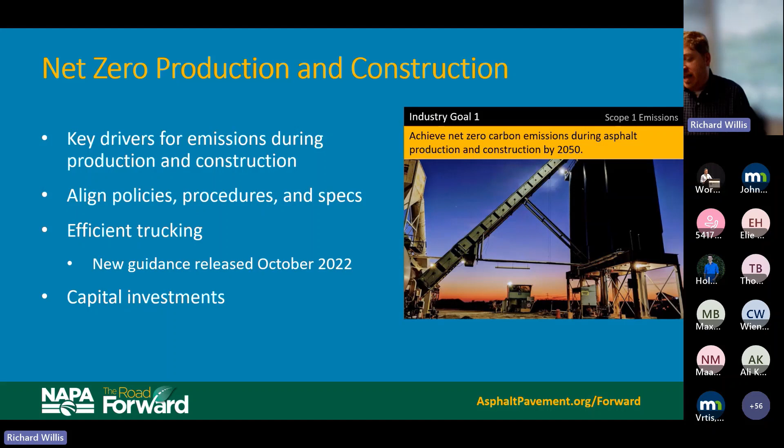And in order to upgrade a lot of the plants that are out there, it's going to take a significant amount of capital investment to take some plants that have been there for a generation or two and make them more modern. But it's not just that. The plants that we use, we could do a lot better with in many cases.

NAPA has an old document that was their Quality Improvement Series number 26, and it was Energy Savings and Energy Management for Your Plant Facility. This year, luckily it's in layout right now, we've got a new document that's going to kind of update this: How to Save Money and Reduce Emissions at Your Asphalt Plant.

It's how do I look at my operations as a manufacturer and do things that I know are not just going to reduce emissions, but they're going to allow me to be more competitive. They're going to allow me to improve the bottom line. And this document addresses many things that we know we should be doing, but sometimes we just don't.

Things like reducing your aggregate moisture content by 1% can save you about 10% in fuel. Reducing your exit material temperature can save you about 2% in energy. Reducing your exit gas temperature by 10 degrees can save you 1% energy. There are numerous things that we can be doing, but we need the tools, we need the education to help plant operators understand why they're doing this. And it's not just plant operators, sometimes it's even the customer.

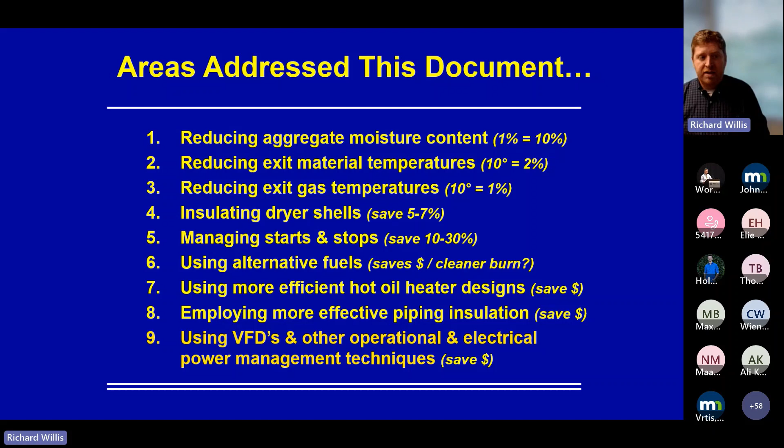Industry does a lot of private work as well as DOT work. And a lot of times the private companies come in, they want that material smoking hot. And they think that that's what's going to make it better for them. But we have to educate them on these opportunities.

One of the other things that we're doing is if you go to our Road Forward website, which is asphaltpavement.org/climate or /forward, we've got operational tips, which are basically ways to help you reduce emissions in your process. And we're actually doing case studies. We've got a case study from Granite Construction on their ROI for insulating their plant better. We've got a case study from Michigan Paving where they're looking at two plants' moisture contents and the energy savings from one where they paved their stockpiles and one where they didn't.

We're highlighting a company in Orlando, Florida. They're no longer using hot oil for their tank farms, but they're using electricity. And one day as the grid gets cleaner, their emissions are going to go down significantly. There's another company we're highlighting that's using liquefied natural gas and the emissions and cost savings from that. We want to continue to show people opportunities for improving in these spaces. But again, there's a lot of things that we just know how to do, but we don't necessarily do it.

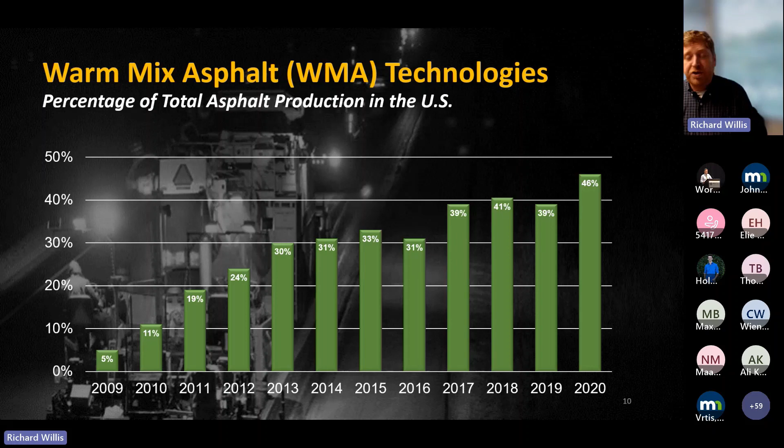When we look at warm mix, in 2009, when NAPA started conducting its annual survey on warm mix usage and RAS and other recycled materials, we were using about 5% warm mix in the country. In 2020, it was up to 46%. In 2021, I think it was around 44. So almost half of the material that we're producing is using a warm mix technology. However, only half of that is actually being done at reduced temperatures. And there are opportunities in this to push us further.

A big source of emissions in the production and construction phase can actually be in your trucking operations. For example, there are parts of the country that are aggregate rich. There are other parts that are aggregate poor. And if you're having to send material hundreds of miles via truck, you can actually see that be a significant portion of your emissions for a ton of asphalt mix. For example, the difference between 100 miles and 500 miles, which some people do have to truck, is significant. But if I can potentially use a train or a barge or an ocean vessel, that's a different opportunity. But it is still significant compared to your typical trucking operation.

There's a lot of places where asphalt plants sit in a quarry. In other parts of the country, your asphalt plant is wherever your job is because you're a portable operation, and who knows where your aggregate's coming from. So considering where you are, your aggregate may be a significant factor in your emissions and moving to net zero. So looking at how you use your locally available aggregate, even if it's not as high quality, and doing your research to figure out how to use it effectively could potentially reduce costs of materials, but also could reduce your emissions from the transportation of those different materials.

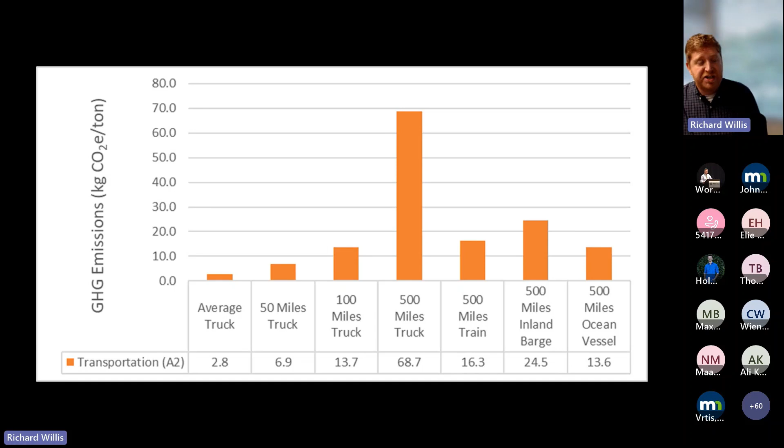Another thing that we commonly stress is as we're looking at reducing emissions, the last thing that I want to do is reduce quality. I want to make sure that I am still producing as high quality material and mix as I possibly can. And so we want to do things like partnering with our customers to reduce emissions through pavement quality, durability, longevity, and efficiency.

And so this is looking at how do we set specs differently? How do we design our pavements differently? And one common thing is we could actually design perpetual pavements. I commonly joke with Amy Miller, who runs the Asphalt Pavement Alliance, that we've been giving out perpetual pavement awards for many years now, but the majority of them are perpetual pavements by accident. We over-design these, instead of intentionally going in and figuring out how do we maximize our material usage and get the most out of our pavements.

And if perpetual pavements is something you're interested in, I would ask you to consider looking at, we've got a call for abstracts out right now for a perpetual pavement conference that's going to be in Louisville, Kentucky in October 2023. And how do we design and build this? The case study of what y'all are building up with NRRA would be an interesting opportunity to talk about this.

Some other things that we need to be thinking about is improving quality. Are there ways we can incentivize that? Virginia is a state that has a 15% bonus for a smoothness incentive because they've realized it saves money, it saves fuel, it improves pavement life, and it allows them to get more out of it.

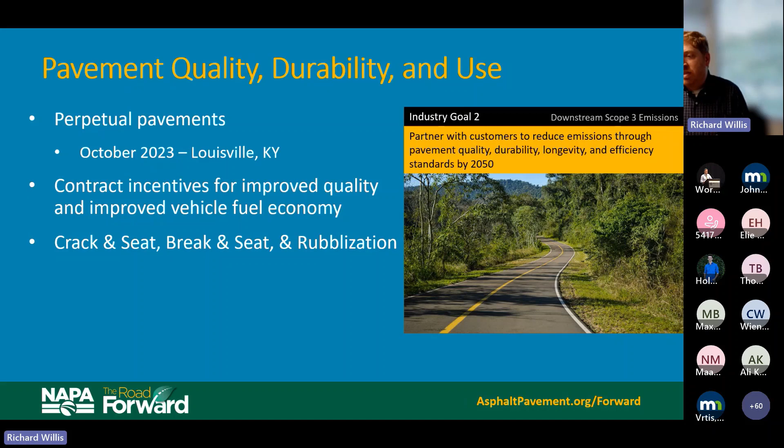We're in the near future going to be releasing a new kind of design method for looking at crack and seat, break and seat, and rubblization. And how do we take failing concrete pavements and build solid asphalt on top of them? But there are things that we can be doing in this stage of life to improve.

A study was done out of UC Davis, the University of California Pavement Research Center, recently, and they published what it could mean for a 30-year life cycle of pavement if they were to get a little bit more density out of their mixes. And it saw that it was pretty significant over the life of the pavement, almost a 20% savings. So things like improving density.

Now, where's the return on investment on that? Do I get the same savings in terms of cost or performance moving from 90 to 92 that I would from 94 to 96? Probably it's better from 90 to 92. So there's some research that needs to be done in understanding that. I think we're looking into some of that through CAPRI right now.

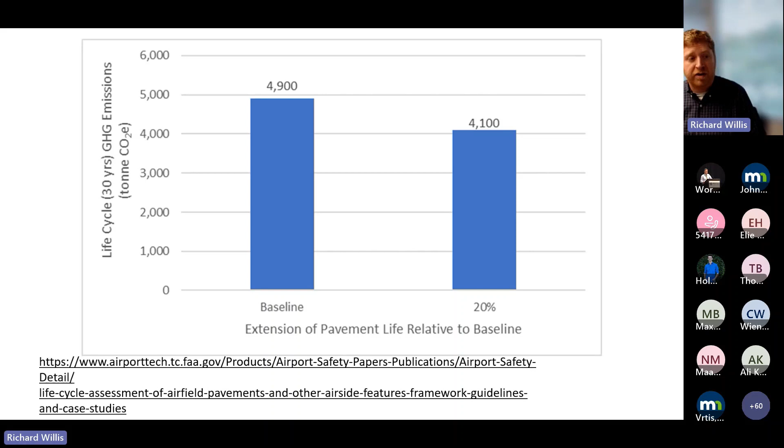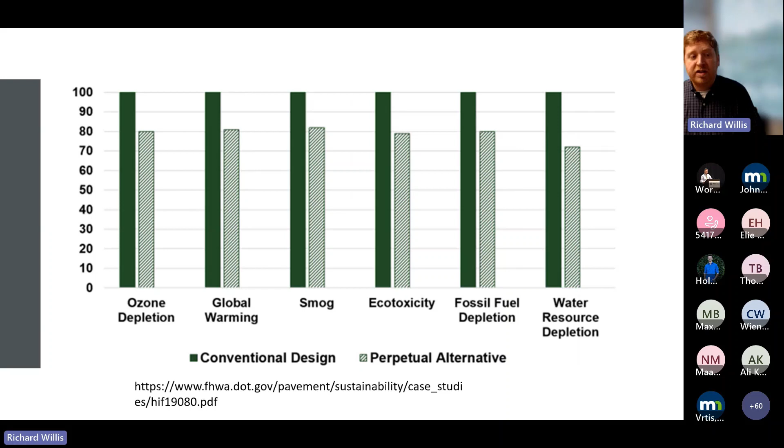Another case study was done looking at Iowa and perpetual pavement design, using conventional design versus the perpetual alternative. And when you look at most of the environmental categories, we see a significant reduction in terms of the life cycle emissions of a pavement when we look at specifically moving towards perpetual pavement design.

One of the biggest things, though, that we as an industry are focusing on right now is that net zero material supply chain, because that is something that I can somewhat control. Some of it is specified to me, but some of it is opportunities that we have to work with people or choices that I can make. And one of the things that we can do is we know we can increase recycled material. We know we can do that.

Right now, the national average has been hovering at around 21, 22% for probably about the last 5 or 6 years. But there are some parts of the country where they're using more than 30%. There are some parts of the world where they're averaging 75 or more. And I'm not advocating that we do that everywhere. We recently did an industry survey to figure out, well, what's the biggest thing that's holding you back from using more recycled material?

And there are some places that said, you know what, it's the specifications. The other places that said, I don't have RAP. We're not milling in my state. We don't have a good milling program, so I don't have material to use if I could. And so every place is going to have to look at things a little bit differently.

I really think that balanced mix design is another opportunity, because as people start thinking about use of recycled materials, people want to automatically go, well, you're making your pavements poor quality. I don't believe that always. I think you can make a virgin mix or a recycled material mix that performs really well. And I think you can also design and construct one that's going to fail pretty quickly if you don't watch what you're doing.

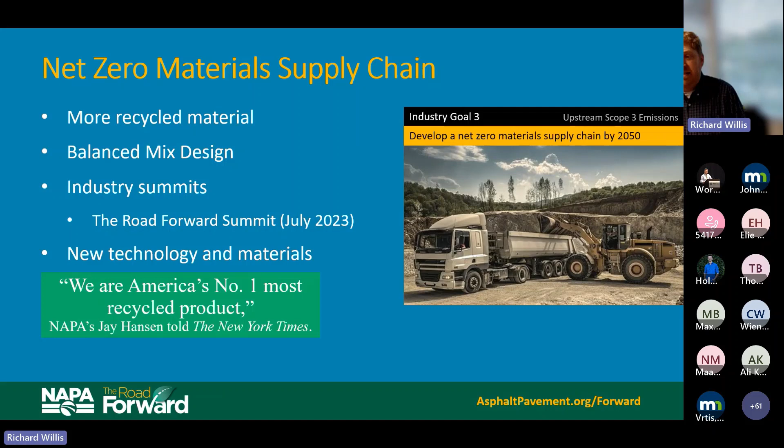We're hosting a summit next month looking at how do we move forward in some of these areas together. How do we work with our binder suppliers, our additive suppliers? How do we start thinking about new materials and technology that's going to allow us to advance into these areas that we can't even fathom right now?

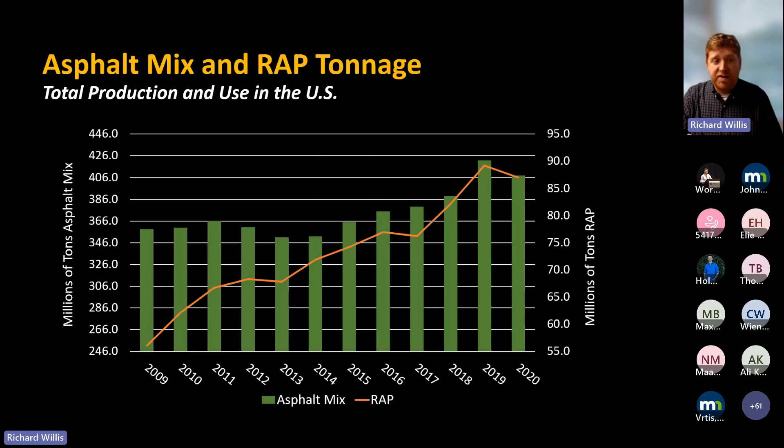Like I said, RAP is one of the biggest assets we have as an industry. And while we look at this trend over the last 10 or 11 years, we do see that we've been using more and more RAP. The challenge is it's because we've been using more and more asphalt mix over the last few years as well. And when we think about where we're going, we need to start thinking a little more boldly, I think, and we need to start thinking about our research a little bit more boldly.

If you look over the last 10 years, we've spent probably in the $40 million range as an industry doing research to increase RAP content mixes without actually doing it. We struggle with actually implementation. And that's one of the things I like about this webinar series. It's about showing, hey, when we put research into practice, here are the good things that it can do for you.

But I remember working on NCHRP 9-46 with Randy West and developing new high RAP mix design standards, and how do we quantify and look at binder and address some of these issues. And I don't know really any state that's actually implemented that in the 7 or 8 years it's been out. I don't know many states that have implemented the findings from 9-55 looking at recycled asphalt shingles with warm mix and how to move it forward. We do a lot of research, but we struggle with actually putting things into practice.

One of the things that I challenge people to do is think differently about their research. I look at a lot of the research that's being put forward, and I classify it as very defensive research. It's how do I keep bad things from happening? I've never read the book, I couldn't tell you the other 6, but when you look at Stephen Covey's 7 Habits of Highly Effective People, I do know habit 2 is begin with the end in mind. We need to think about where we want to be.

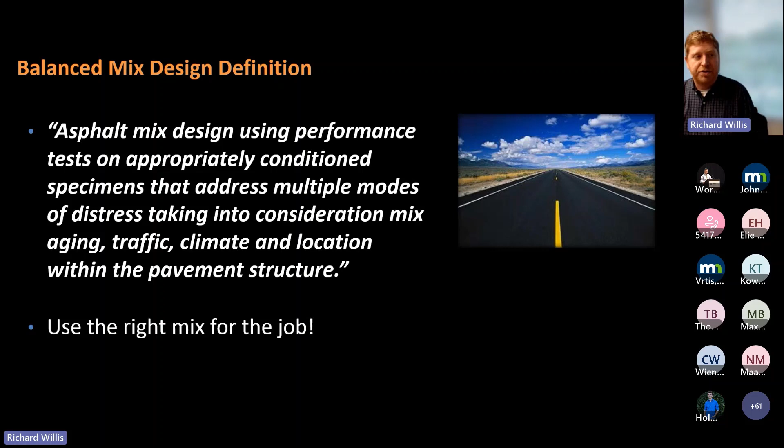Now, why do I think BMD has an opportunity for us here? It's because I think if we fully embrace this, on the material side of things, on the improved performance side of things, BMD can get us a long ways towards net zero.

There are 4 different approaches that people take when they look at it, and I'm going to define them this way. So you've got your volumetric design with performance verification. That's where I take my typical volumetric design that I've got right now for my DOT, and then I throw another performance test on this. And what I've done is I've taken the contractor's risk and a target that was originally about that big, and I've now taken it down to a target that's about that big, potentially with no real benefit.

I kind of call this the Little Debbie school of mix design. It's when you buy an oatmeal cream pie, you know exactly what you're getting. There's a standard recipe, there's a standard process that every single one of those things follows, so they know exactly what they get. But at the end, it's a Little Debbie. It's going to look like an oatmeal cream pie. It's going to taste like an oatmeal cream pie. It may be special when you're younger, but when you're older, it's not necessarily what you're always craving.

Option 2 is the volumetric design with performance optimization. I call this the Amy Willis school of mix design, where Amy loved to bake. Follow the recipe, but tweak it just a little. She would keep the science sound, so she wouldn't change the egg, the fat, or whatever ratios in there—I cook, I don't bake—but she might add a little bit of a different seasoning, a little more of this, to try to make it a little bit more exciting. And that's really what this type of volumetric design is: I can tweak the volumetrics a little bit based on the performance expectations that I need.

The third is performance modified volumetric. I call this the Alton Brown school of mix design, where you keep the science. You're not really worried about the specifics of the recipe, but you really want to make sure that in the end, the volumetrics are set so that nothing's going to go too bad. But you want to optimize the mix components and proportions through your performance testing.

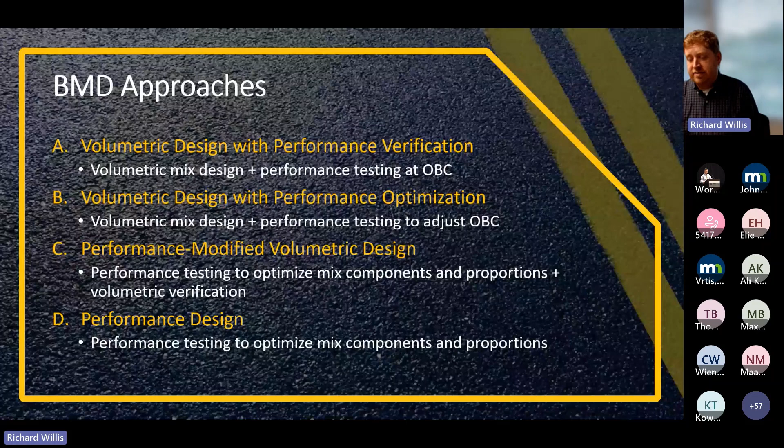That's where our goal should be: at the end of the day, does that mix perform? Now, there are things that can be done along the process that are going to make it not perform as well. You can mess that up in plant operations. You can mess that up in construction. You can put a really good piece of asphalt on top of a really lousy foundation or broken up road, and guess what? It's not going to last as long. But on the mix side of things, that's what we're looking for.

Because when we have the opportunity to move from A to D, we have the opportunity to innovate. We have the opportunity to potentially take more local materials and use them. We have the opportunity to allow contractors to use their kitchen, the asphalt plant, with their locally available materials and try to make something that's going to perform the best at the lowest emission and the lowest cost for their customer.

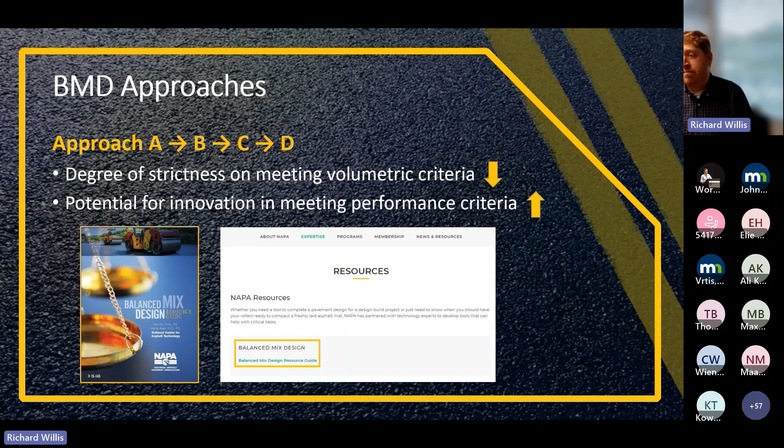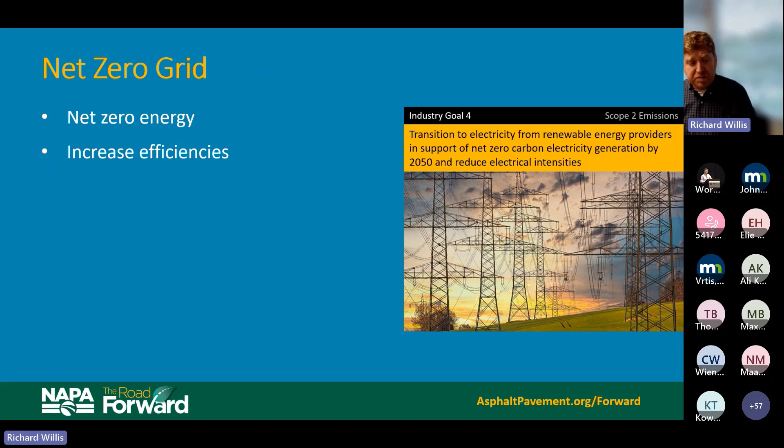One of our goals is around a net zero grid. Net zero energy is where the entire country is trying to go. But it's not just that—I want it to be zero, but I also need to think about efficiencies. Because as we move to more renewable energy, I want to make sure we're not putting too much burden on the electric grid if we're all plugging our cars into it. We want to make sure we're thinking about how we move all those things going forward.

The last part of that road forward plan was looking at carbon offsets. Again, it's net zero, not total zero. If I'm getting aggregate out of the ground, if I'm making asphalt binder, there are emissions associated with that. But the reality is we want to, as an industry, push this as low as possible and then offset as little as possible. Offsets are something we're going to be looking at and talking about in the near future.

I tried to stress this earlier because a lot of people think that when I start talking about things like low carbon, I'm immediately creating a bunch of trash asphalt mix. The reality is sustainability and quality are not mutually exclusive terms—not at all. In fact, when we start thinking about things from a life cycle perspective, the longer I can make it last, the better it's going to be.

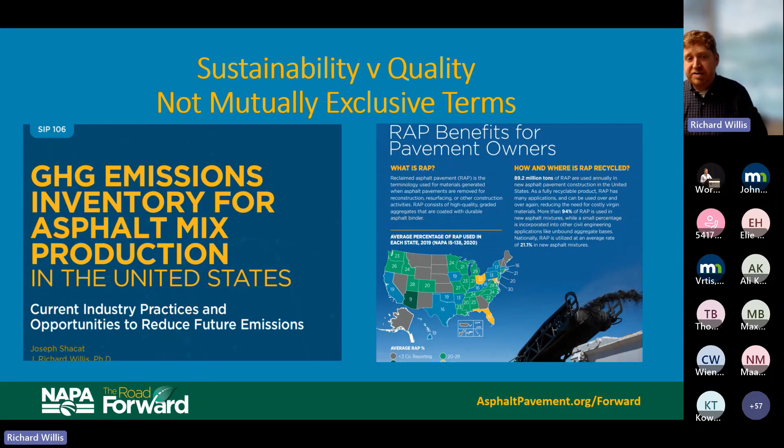We also see this in our greenhouse gas emissions inventory: we can produce asphalt mixtures at a lower carbon material based on the technology we have right now and still get them to perform. This is specifically when we start looking at things like RAP. There are benefits to RAP as pavement owners, and we've put out a document recently about why RAP is important for you as owners and what it could mean. Specifically, when we start looking at things like emissions, which is coming to a state near you very, very soon...

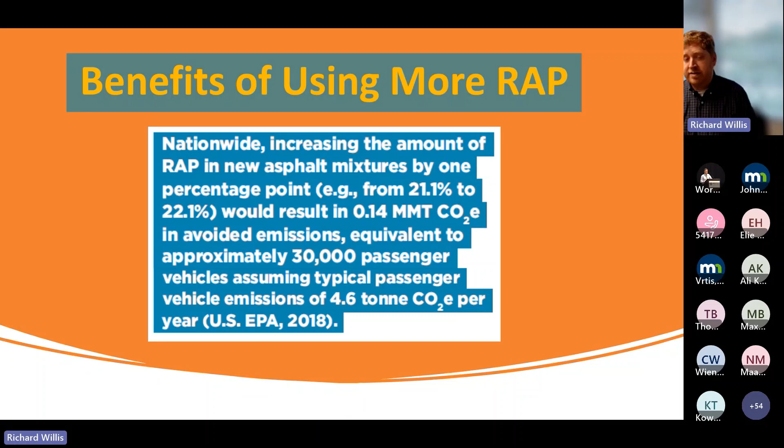If we could move our national RAP content by 1%—taking that national average, which was 21.1% when our report was written, and moving it to 22.1%—that's the equivalent of taking 30,000 passenger cars off the road for a year in terms of emission savings. One little thing can have a significant impact in what we're trying to do in moving to net zero.

So what if we could do some different things? Like what if we could increase our RAP content from where we were in 2019, from 21 to 40%? What if we could increase the amount of natural gas we use, because natural gas has less emissions than things like propane, diesel, and other oils? What if we could reduce our moisture content in our mixes by 1%?

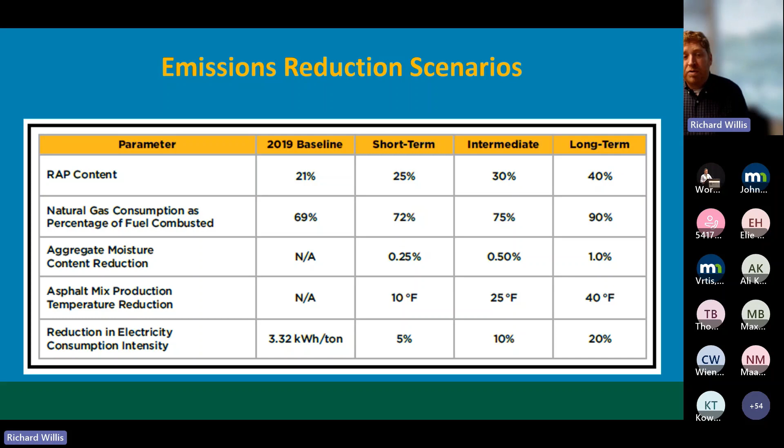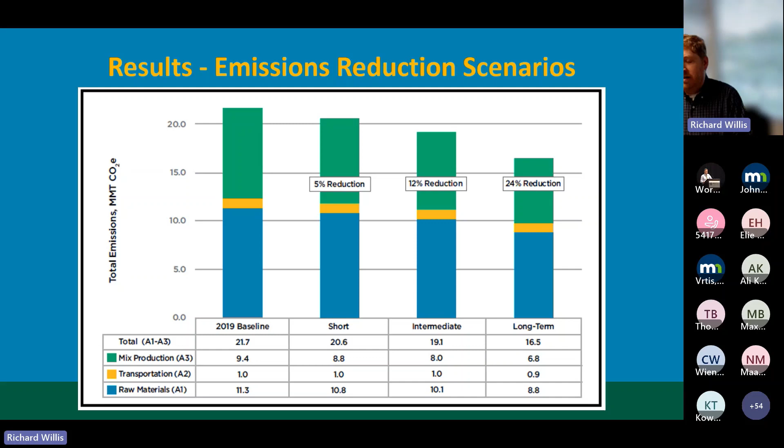We could do this by covering our stockpiles, paving under our stockpiles, or getting aggregate that wasn't washed. What if we could reduce our asphalt production temperature by 40 degrees from where we are now, or reduce the electricity intensity? Doing some of these things, which we know how to do right now—hitting some of those long-term goals—that's a 24% reduction in our materials, transportation, and production side of things. There are significant impacts we could achieve as we start looking at low carbon construction materials.

Now, why is this important for us? When I talk to contractors, I tell them many times that the things that save you emissions affect your bottom line. They're improving efficiencies, they're making you better as a company, and that can impact your profit. That could impact your bids.

I commonly tell people that the next generation, the people coming into your workforce—this is who they are. This is going to be something that, no matter what side of the aisle they're on, they're going to care about. They may use different terms, and they may not necessarily say things like climate change, but they care about the world they live in.

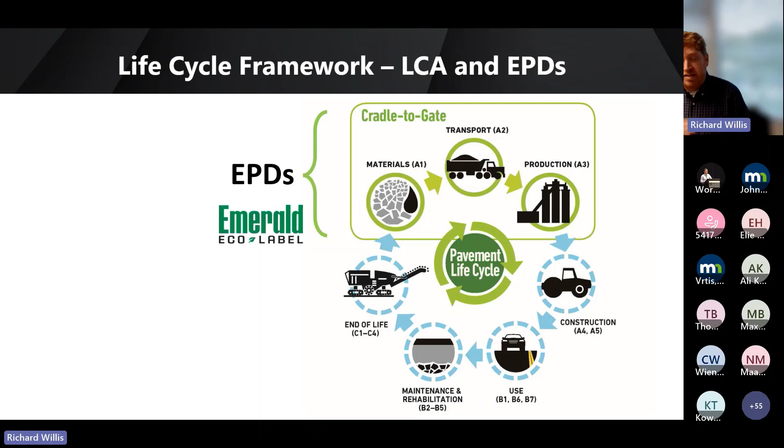But the reality is also there's a lot happening right down the road from where I am today that's going to impact decision making. It's going to impact people's ability. The legislation and these efforts are happening, and so we start looking at things like life cycle assessment and EPDs, or environmental product declarations.

LCA Pave was a tool that was developed by Federal Highways a couple of years ago, and it looks at cradle to grave LCA for pavements.

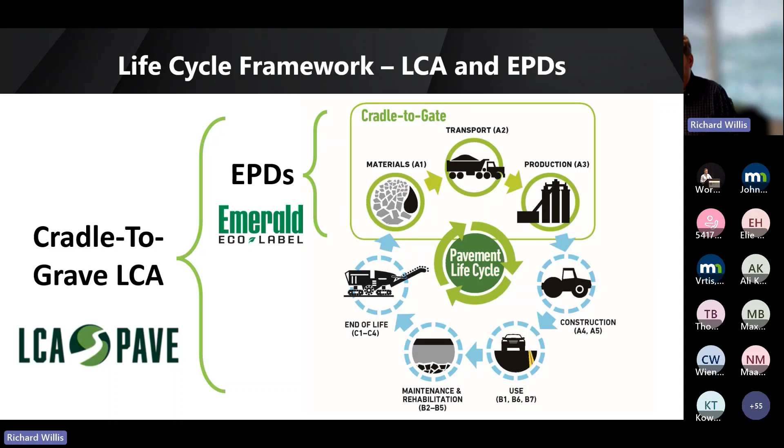We have the Emerald Eco label, which is an EPD program, commonly seen like the nutrition label for environmental impacts for an asphalt mix. It helps make sure that everyone producing an EPD for an asphalt mix is following the same set of rules and standards.

When you listen to a lot of what's happening in DC, there are certain terms being used, and it's very important that we understand the different types of carbon in these pieces of legislation or policy. The two main ones people talk about are embodied carbon and operational carbon. This was really set up in terms of language for vertical construction.

We're trying to apply it to pavements. It's not necessarily trying to shove a square peg in a round hole in many ways, but there are similarities. So I'm going to use a vertical construction example, and I think it'll translate well to roadways.

When people talk about embodied carbon, it's the amount of carbon released in the manufacture, transportation, and installation of different construction materials. Think about the house or building you're in right now - that would be the transportation of the carpet, the steel, the wood, the concrete, the paint, everything used to build the house or that building.

Now, the operational carbon is all the carbon associated with using that building. What is the energy and emissions associated with running the electricity for your computers, your Wi-Fi, your air conditioning, and all those different things? That's the emissions used in the operational phase.

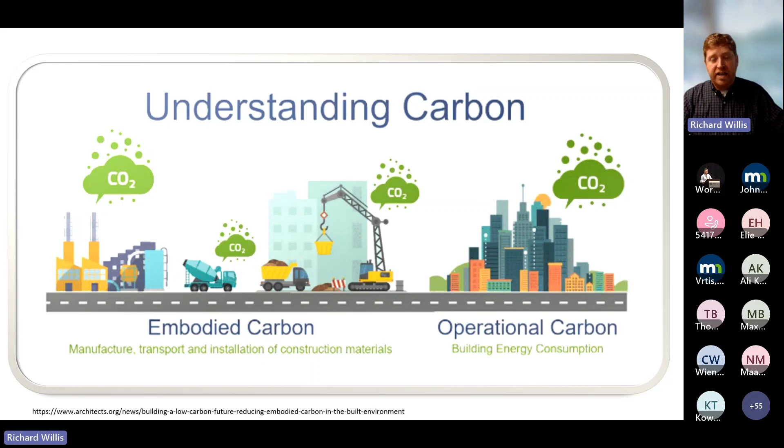When you look at most of the policy coming out, it's really focused on that embodied carbon standpoint. So you have groups like the Buy Clean Task Force working for the White House right now, coordinating across 17 different federal agencies that account for 90% of the construction materials purchased by the federal government. They're prioritizing steel, concrete, asphalt, and flat glass, moving towards Buy Clean.

And the USDOT came out - I was actually in Minnesota at MnROAD the day that presentation went out, about an hour after I gave a presentation on this, where they said we are going to be developing a Buy Clean policy based on EPDs. So USDOT has said they're moving in this direction.

GSA was really one of the first ones out of the gate where they developed their environmentally preferable asphalt standard, looking at federal office buildings, courthouses, and land ports of entry. If you were going to be producing an asphalt mixture using this standard, you had to submit an EPD and use two different environmentally preferable techniques.

One of the reasons we worked with GSA to get this kind of a menu list is that sustainability stems from a sense of place, and what may be sustainable in Minnesota may not be sustainable in Arizona.

We talked about RAP availability. There are some places where they would love to use 21% RAP in their mix, and there are some places that couldn't use 21% RAP in their mix if their life depended on it, just because of availability. So we have to think about what is appropriate for that contractor.

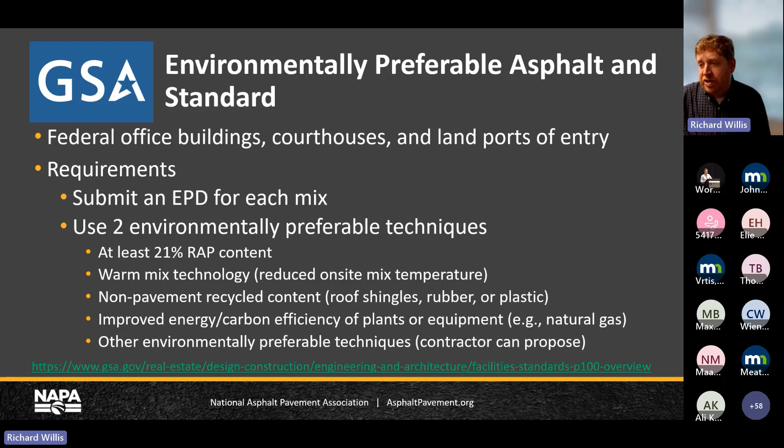So they were given that opportunity - you can use warm mix with reduced on-site temperatures, you can use some kind of other recycled content like rubber or roof shingles, you could use natural gas as opposed to diesel, or some other environmentally preferred technique the contractor can propose. In 2022 and early 2023, there were 7 different asphalt projects that used this standard across the country.

Then there's things like the carbon reduction program. It was a part of the Infrastructure Investment and Jobs Act, or the bipartisan infrastructure law, where there's a $6.4 billion program to help states reduce carbon emissions.

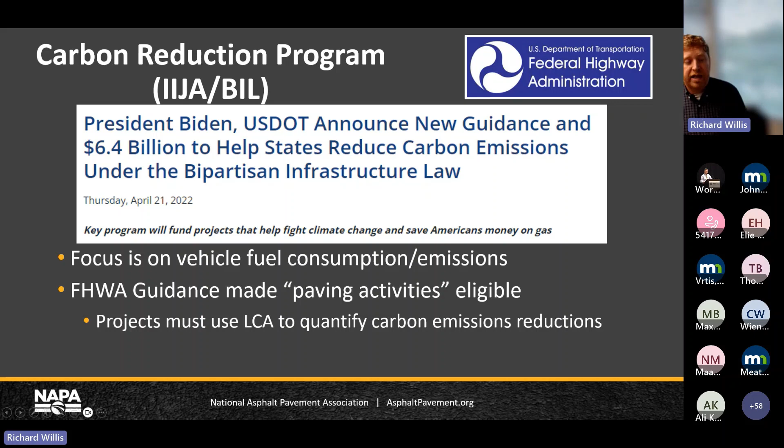Now, this was originally set up to try to get people to reduce VMT and get people off the roads, but FHWA put out guidance that said paving activities are eligible, but you have to use some kind of LCA or EPD to show the carbon reduction and that it fits under your program. So these monies are formulaic funds that can be distributed to the states, but that's an opportunity to potentially move in the direction that's going to allow you to do some different things.

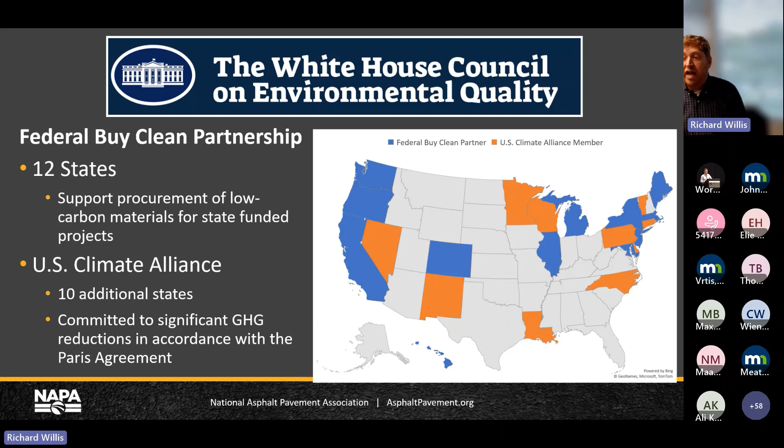Again, there's now a federal Buy Clean partnership that's out there. And numerous states have come out and said, yes, the federal government is going Buy Clean, and we are going to as well. There are additional states that are part of the U.S. Climate Alliance that are committed to achieving the greenhouse gas reductions in accordance with the Paris Agreement. And there are states that are a part of NRRA that are definitely lit up in either the orange or the blue in this. And so eventually it will be coming to the DOT to look at how you are going to help reduce some of these emissions associated with your work.

The Inflation Reduction Act really stomped on the accelerator for the industry on this, because the EPA was given $250 million to standardize EPDs and help industry develop them, and another $100 million to develop a low carbon construction material labeling program, which has to be out by September 2026. So the question then is, how is low embodied carbon going to be defined? How are we going to say what's low and what's not, or substantially low? The DOT was given $2 billion to procure construction materials with substantially lower embodied carbon.

So this is for federal aid highway, federal lands. And in this program, what they can do is actually pay either the differential cost.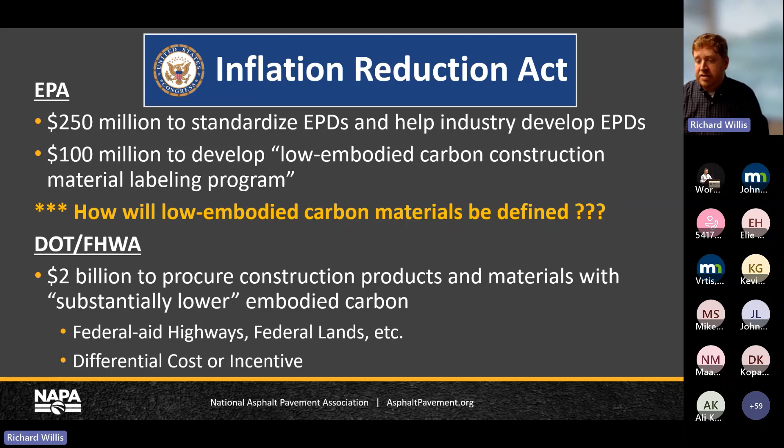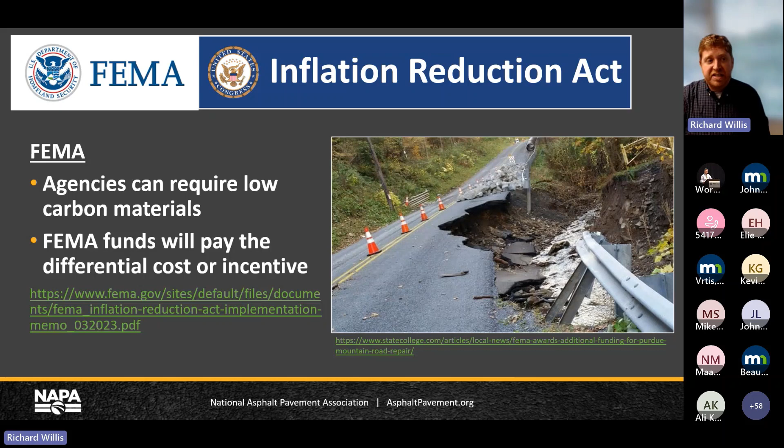If it costs more to procure the low carbon construction materials, they'll pay that differential cost. And if it costs less, they will pay up to, I think it's a 2% incentive to the DOT for using those types of materials. But even FEMA now is looking at things like low carbon construction materials, where they're paying differential costs or incentives. HUD even started looking at low carbon construction materials. All of these different agencies are starting to consider how to move in that direction.

And this is how low carbon is being defined right now by Congress. So what they came up with is they want you to look at all the EPDs that are out there for your different materials, and you have to be in the top 20% to be low carbon. If that's not available locally, they'll let you go up to 40. If that's not available, you just have to beat the industry average.

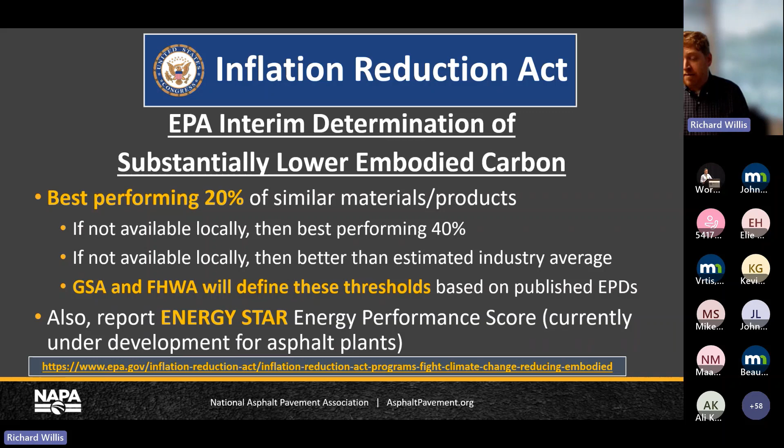But eventually, these numbers are going to be set, and in fact, some of them have been set recently. Originally, GSA came out with this in January of 2023, where they basically said, okay, for all of our IRA money, we are going to now say, for asphalt mixtures, you have to be below 62.8 kilograms of CO2e per ton of asphalt mix. I know that number really means nothing to probably most of you on the call. But that wasn't just the number on your EPD. You had to apply an uncertainty value to it, because we're not necessarily sure all these numbers are correct.

Well, one of the challenges with this is that 62.8 was set in stone. And it didn't matter if it was a polymer modified mix versus a neat binder. It didn't matter if it was an SMA versus a dense graded mix. It didn't matter if you were in Phoenix, Arizona, where the DOT requires 1.5% lime, or in a state that doesn't require lime at all. And just so you're aware, lime is a significant impact. Adding 1.5% lime adds 18 kilograms of carbon dioxide to your ton of asphalt mix. But these limits applied to everything.

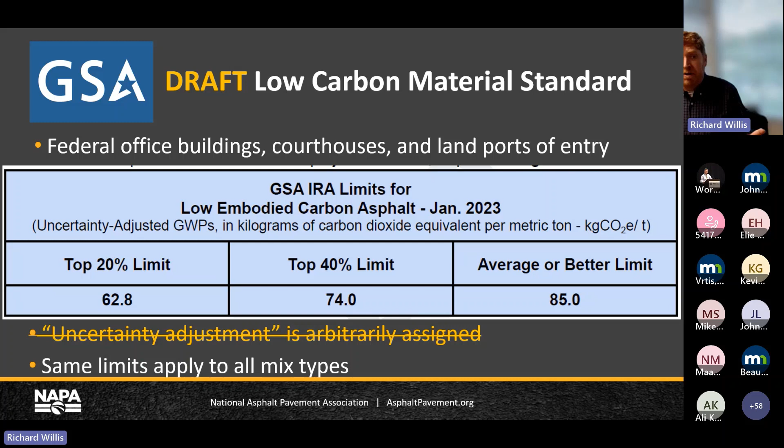Now, luckily, GSA took a little bit of feedback and went back to the drawing board a little bit. But it's impacting us all in different ways. The Federal Acquisition Regulatory Council is looking at contractors having to report their emissions, looking at scope 1, scope 2, and scope 3, depending on how much federal work you do on an annual basis.

If you get 7.5 to 50 million, you're a significant contractor, you have to report scope 1 and 2 emissions. If you're over 50 million in annual federal contracts, you have to report scope 3 as well. Now, by federal contracts, that's not federal aid highway work, but it would be if you're doing work for federal lands, National Park Services, DOD, those would count towards you.

So as an industry, we're having to look at, how do I start looking at this? And if I'm a major contractor, I even have to start looking at things like setting science-based targets on what I'm going to do for emission reduction.

Going back to GSA, a few weeks ago, on May 16th, GSA announced that they're going to actually have their new numbers in place. And what they basically did is they took out uncertainty. But the same limits apply to all mixes wherever you are in the country. And they decided there are going to be 4 different projects that use the substantially lower asphalt product. In Minnesota, you lucked out and don't have to worry about it right now. But there's going to be one in Colorado. There's going to be one in Arizona, Land Port of Entry, North Dakota, and Texas.

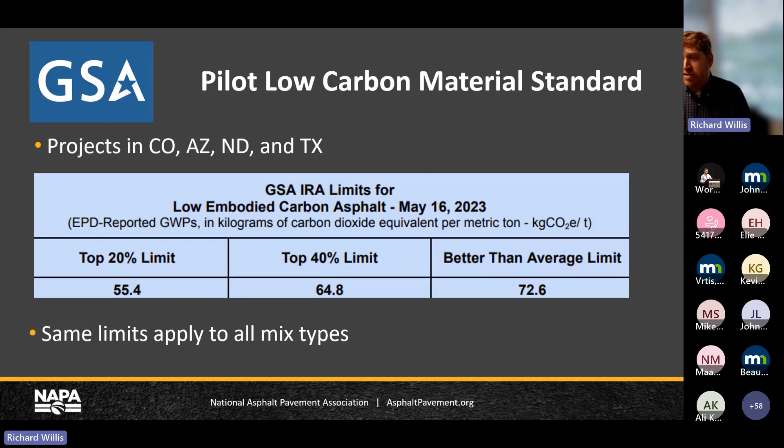So NAPA has just been in the process of trying to do a benchmarking exercise for the country, looking at different regions and potentially down to a state level to try to come up with better, more meaningful numbers so that people can think locally and figure out, how do I do better where I am? And if everybody is trying to do better, it's going to allow us to move things forward together.

And one of the things that we did is we met with FHWA and we met with EPA at a workshop at our office, where we started thinking about, how do we take all of these things that are happening? How do we take all these policies? How do we take these pieces of legislation and actually do something meaningful? Actually do something that's not just spending the money to spend the money, but trying to make a difference and trying to help industry goals as we're looking forward.